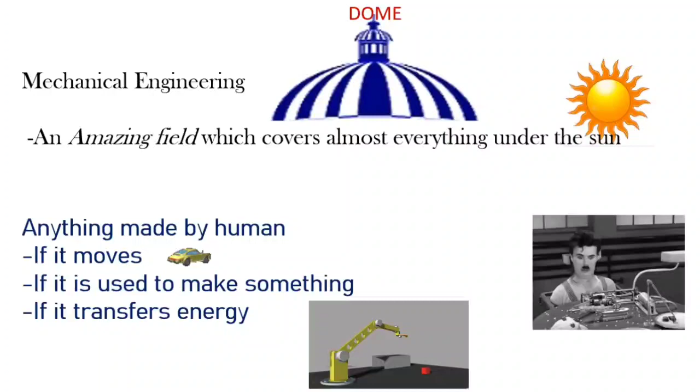Mechanical engineering is an amazing field which covers almost everything under the sun. That's why I have put a symbol of dome, which is inclusive of all the other engineering fields. Our human body has so many reflexes and reactions, which happen due to energy intake, and it's a continuous process from the birth of a child to death. I meant to say our human body itself has so many mechanisms.

The same can be installed in a non-living thing, which itself is nothing but mechanical science. If you take an example, anything made by human, if it moves, it belongs to mechanical engineering. If it is used to make something as a product, again it belongs to mechanical engineering discipline. If it is related to transfer of energy, again it is related to mechanical engineering.

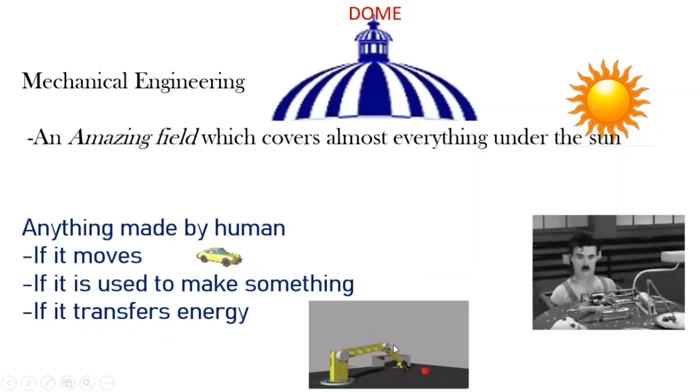Look around you, you can identify the mechanical engineer's role. In our day-to-day life, we use so many engineering products without knowing the hardship spent on these products. If we try to question how it is made, we can understand the diversity of engineering application.

If we take a look at a phone, it has multiple operations performed on the same gadget, and those operations are made tangible by various manufacturing processes. Phone is a logical device, it is an electronic device, it is a mechanical device. Again, it obeys laws of physics in receiving and transmitting signals.

The same thing can be applied to many other products like laptop, our mouse, maybe a TV, a sofa, or a cup. We make use of cup in our day-to-day life. To make a cup again, we need a mechanical device. Simple to complex products are done by mechanical engineering.

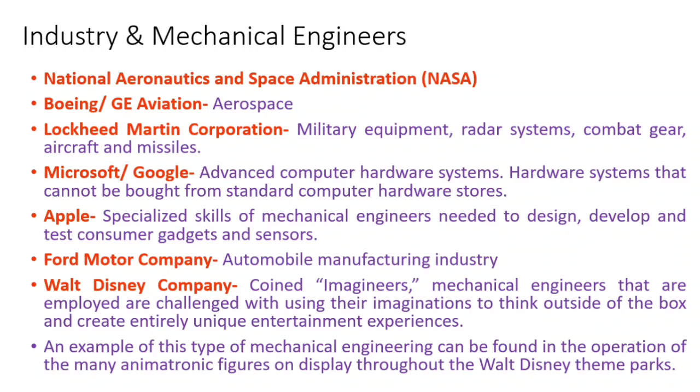Again, I've taken Walt Disney Company. It's an entertainment sector. Why is a mechanical engineer in an entertainment sector? Look at this—they are coined as Imagineers, mechanical engineers that are employed are challenged with using their imaginations to think outside of the box and create entirely unique entertainment experiences. An example of this type of mechanical engineering can be found in the operation of many animatronic figures on display throughout the Walt Disney theme parks.

Robotics and mechanical engineers. Robotics started with the concept of continuing manufacturing in hazardous environments, maybe in nuclear or chemical industries, possibly in unmanned conditions. This is how robotics evolved.

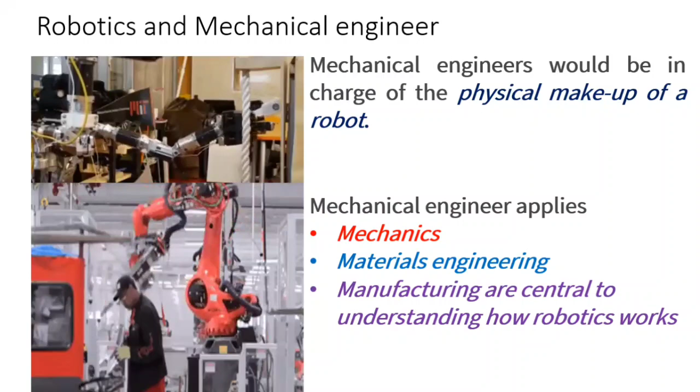As technology advanced, interdisciplinary branches tied up together for one application. You can see in this figure a robotic arm performing one operation. To perform that operation, multidisciplinary facets are brought together with mechanical engineering as the core physical makeup. To make robotics happen in real time, mechanical engineers acquire and apply mechanics, materials engineering, and manufacturing sciences, which are central to understanding how the robotic works and is made.

Here I have mentioned aeronautical, aerospace, and astrospace, which are specialized fields of mechanical engineering. Aeronautical relates to aeroplanes and fighter jets, which operate within the Earth's atmosphere. Aerospace includes rockets and satellites, which are operated above the stratosphere. Astrospace, an example is Hubble's telescope. Vehicles which are used to study the astronomy of galaxies also fall under this category.

To make all these products happen, mechanical engineering is required, and a certain set of standard operating procedures are followed: designing, analyzing the designed plan, running simulation, establishing operating standards for the product, and developing prototypes. These prototypes are again tested before being made into a product. Of course, this slide covers aeronautical, aerospace, and astrospace.

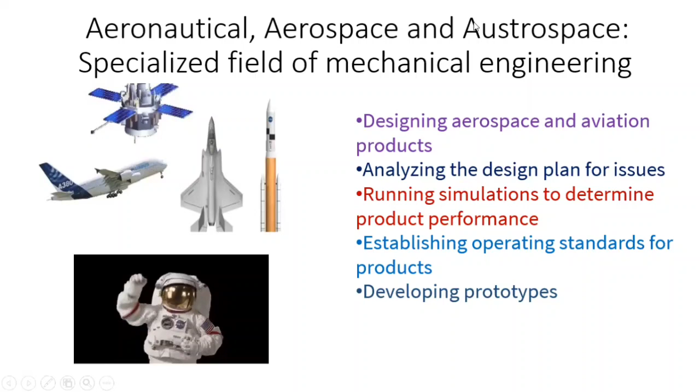If a piano has to be automated with the exact notes as the output, we can make a prototype of a finger robot which can press as well as traverse along the length. The operation of the finger is mechanical. This operation is controlled and actuated by the electrical signal. These signals are generated by the microprocessor, and these microprocessors are again coded with a set of operations. Here again, I have shown a mechanical, electrical, and electronics interface for a mechatronics device.

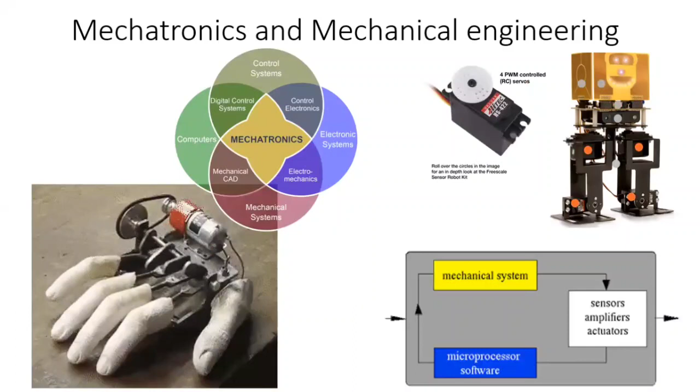Electrical engineering, power sectors, and mechanical engineering. Any industry needs electricity to operate. On Earth, electricity is generated using conventional and non-conventional sources. To generate power from these materials, a combined system of mechanical and electrical is a must. Dams, turbines, windmills, solar cells, tidal actuators — these are the mechanical systems incorporated along with AC or DC generators, amplifiers, and transformers, which are considered electrical devices.

But in reality, electricity itself is not a physical quantity. Mechanical devices are the carriers of electricity. You can see a generator here. If you look at it, you can make out that it's all a mechanical component. And here I have shown a power grid, which is energy storage technology, and has a relationship with or is an integral part of mechanical engineering.

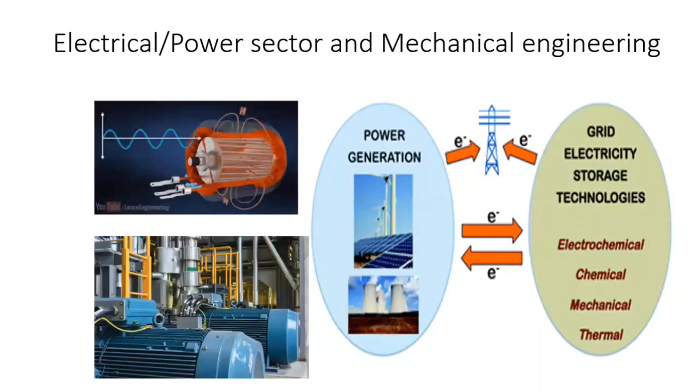Here we are with structural and mechanical engineers. Any workspace and living space is of prominent importance. Any structure will be subjected to force, maybe due to gravity, or forces acted by the atmosphere, or force due to self-weight, or maybe due to external disturbances. The rigidity and stability of the structure has to be clearly analyzed before actual construction, which makes the entire process cost efficient. Mechanical engineers will be able to build and design a 3D model of the structure, apply forces to it at various points which are within the factor of safety, and analyze for any faulty areas.

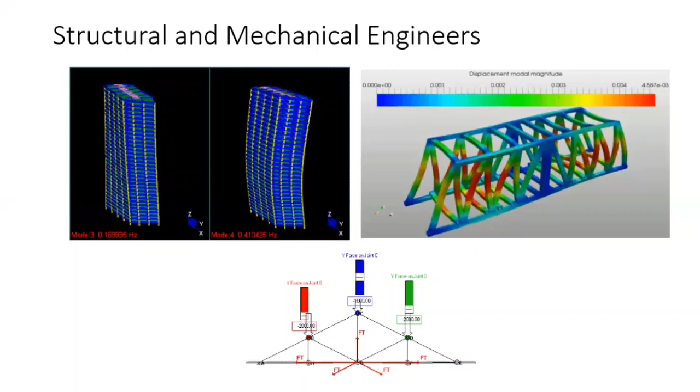An example of artificial intelligence is Alexa. To assemble the products or components of Alexa, it has to be manufactured — obviously, this belongs to a mechanical engineer.

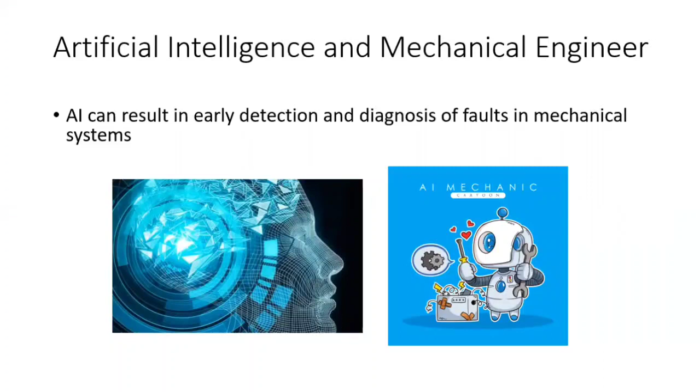Here we are with the biomedical field and mechanical engineers. Any human being may require some precision surgeries, so the entire system needs to be sophisticated. To achieve this, we combine robotics, mechatronics, image processing, and mechanical systems. A display of a prototype biomedical device is shown, which is used for multiple operations at multiple points with high accuracy.

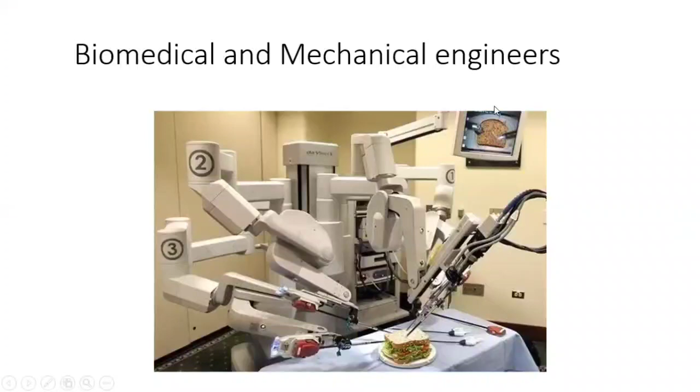Till now, we had gone through some of the applications where mechanical engineering plays a vital role. Now let us see what is the applied science required by a mechanical engineer.

Mechanics deals with motion and force. The force may be related to statics or dynamics. It provides the knowledge of force and its outcome when applied on an external body, with relevance to any matter on earth, whether solid, fluid, or matter in space. We can analyze the relevant motions.

Here I have displayed some mechanisms which are related to mechanics. For example, two solids here, gears, which are in mesh with each other, transfer motion from one point to another. Here again, it's a solid to solid interaction, a motion transfer. Here it is fluid to solid motion transfer. In this case, it is the interaction of the gravity force of the object in space with the earth.

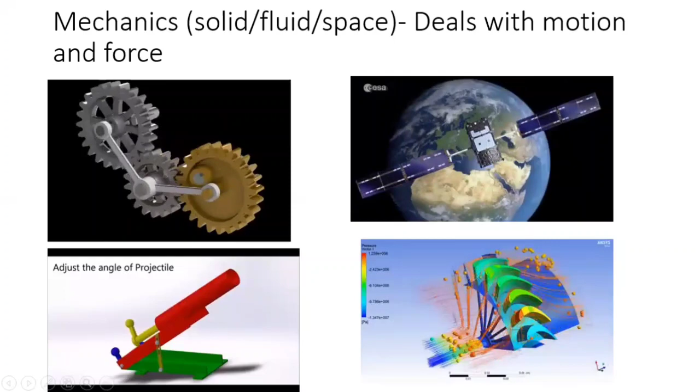Thermodynamics: several materials on earth possess huge amounts of energy which is liberated with the interaction of heat. The science which relates energy and its useful work is broadly termed thermodynamics. Here, an IC engine is displayed, which is a mechanical device, an internal combustion engine. The purpose of this device is to extract work from the fluid, which is nothing but a fuel.

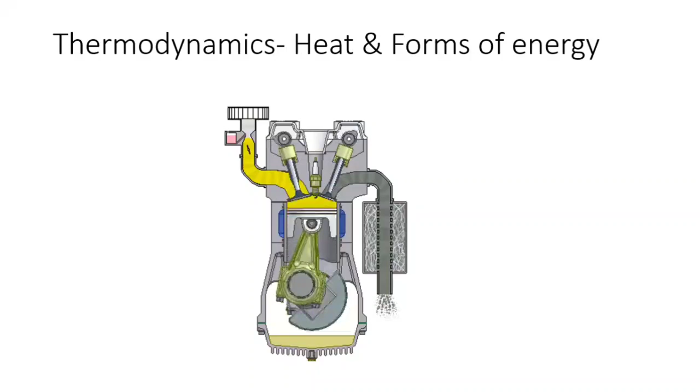Design and analysis, a core science related to mechanical engineering. Design has two important aspects: stability of the product and the lucrative aspect. It should be good and look good. Both aspects all of you prefer. Here comes the design aspect.

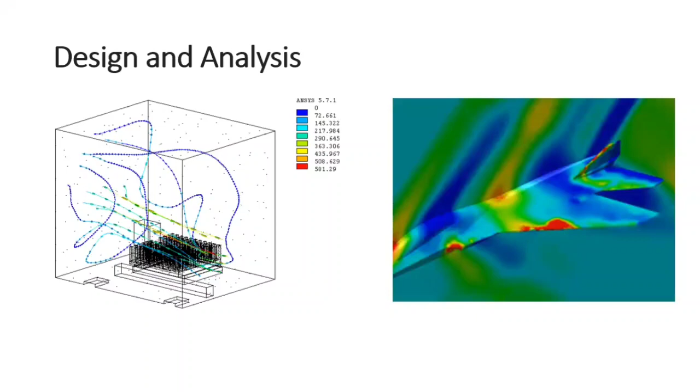From a simple to a sophisticated product, design and analysis is required which can reduce huge cost compared to the trial and error method. To accomplish this, several mechanical softwares are used as analytical tools.

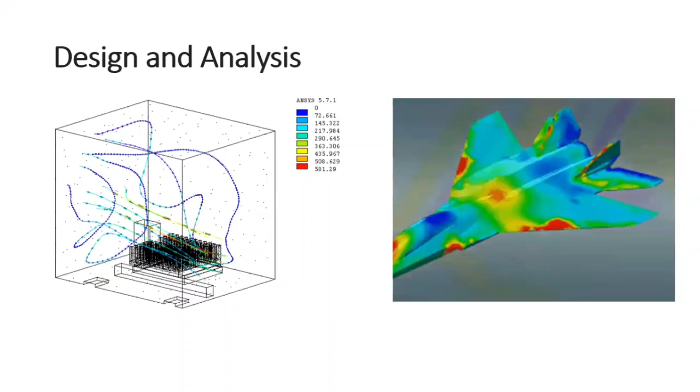Materials, again a core science related to mechanical engineering. Material may be a general material, it may be a metal, it may be a polymer, it may be a ceramic, a composite material which is a combination of two materials, it may be a smart material, related to micro and macro level.

We have seen from the Stone Age, Bronze Age, Iron Age, and in the Iron Age, many of the cast iron products from the olden days are replaced with stainless steel, and stainless steels nowadays are replaced with carbon fiber composite.

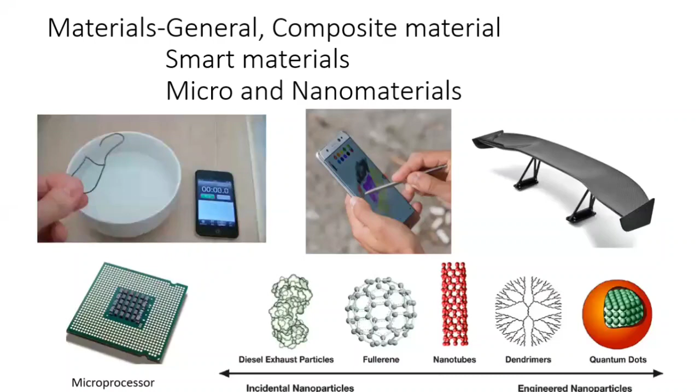Manufacturing is a vast field which is used for making products from raw material. Manufacturing includes the production of simple domestic appliances to complex products. Manufacturing involves many subsets like machining, joining, forming, and casting.

Here I have shown a domestic appliance and an assembly line of an iPhone.

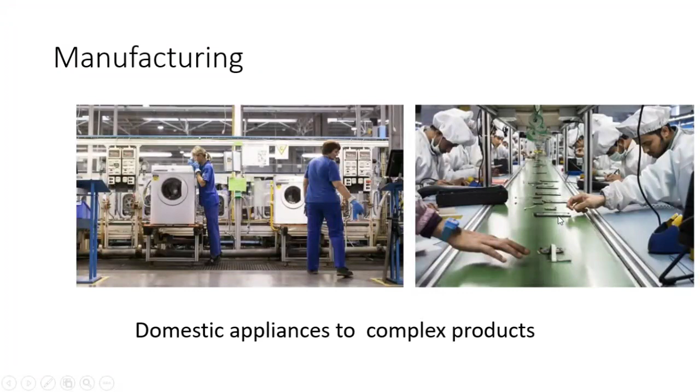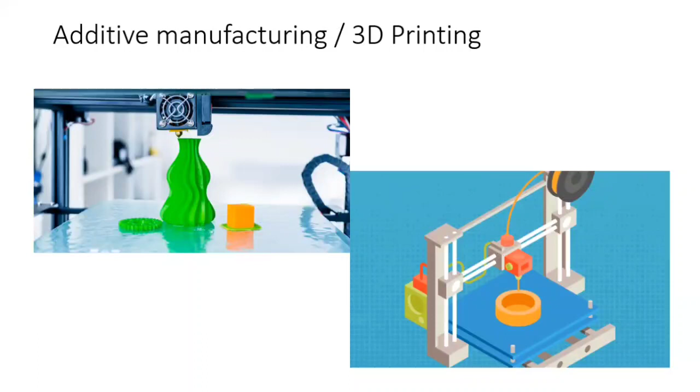An advanced manufacturing technology is related to 3D printing or additive manufacturing. It's a precise manufacturing process which can be tailor-made for any product. 3D printing or additive manufacturing produces a 3D object from a digital 3D model or print.

Finally, mechanical engineering is all about movement, the application of science and technology to solve real world problems through the manipulation of moving parts. Engineering is problem solving. There are problems in every field, so if you like to solve problems, you would never be bored in engineering. Creativity translates to innovation in engineering, which again says that if you are creative, you will have ample opportunities for creativity in every field. None of these fields is saturated, especially when it comes to technology. Thank you.

Engineering is not just a tag, it's a way of living. The process of molding you all for the next four years will not just give you a degree, rather it gives you a personality. Personality is the representation of your experience and the acquired knowledge. The current life you go through becomes tomorrow's experience, and hence every moment of yours counts.

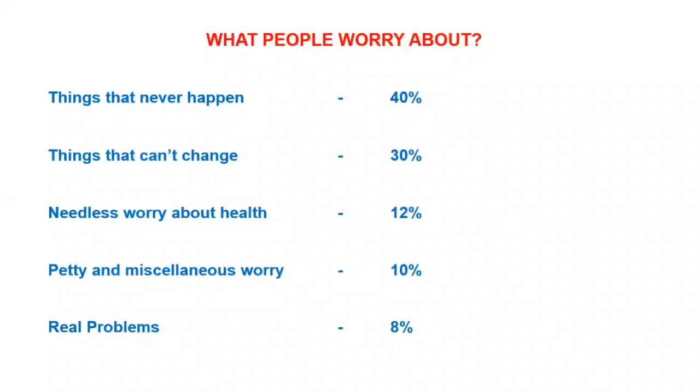A SMART goal. To achieve the goal, the following SMART approach is required. S stands for specific, M stands for measurable, A stands for achievable, R stands for realistic, and T stands for time bound. The time bound is very much required for human beings, not only for students.

Time is time. Right now the time is morning 10 o'clock, the same 10 o'clock Thursday, today's date is 24th of December 2020. You can't get it back. So time is very precious. Kindly make a note of it, please.

Setting the goals, there are 3 different categories. Number 1 is long-term goals, 3 to 5 years. Number 2 is short-term goals, 6 months to 1 year. And finally, immediate goals, at least 1 month or 30 days is required.

Long-term goals is within 3 to 5 years. Now in 2020, you are admitting into first year, 2020-21. Then 2021 to 2022, 22 to 23, 23 to 24. At the end of 2024, April or May, you will be in position to complete your BE degree. After BE degree, that means 3 to 4 years, so it lies between 3 and 4 years. That means long-term goal. What is your long-term goal?

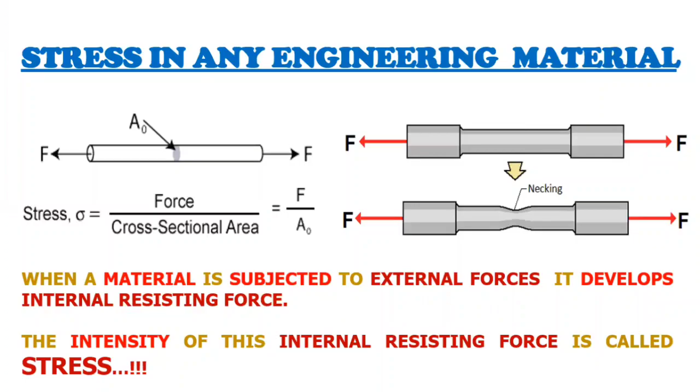So now what is stress in a material? I am trying to link stress in a material to stress in a human being. For the same shape and size, developed stress is the same in all materials. Similarly, for a given situation, every human being is subjected to the same amount of stress, whether he is a fatty person or lean person, whether intelligent or not, the stress is same in each and every person.

But how he responds is different. The ability to withstand the same amount of stress is different for different materials, meaning different materials fail or collapse at different stress levels. Similarly, for a given situation, every human being acts differently when subjected to stress - it is the ability of each person to overcome stress.

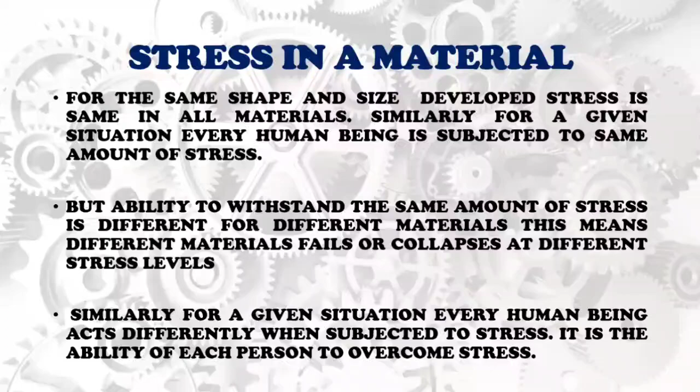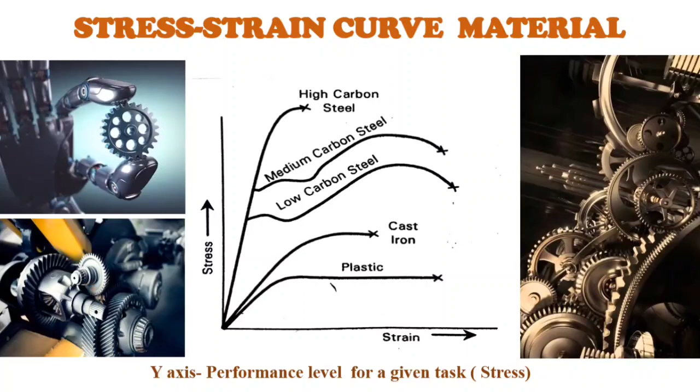Let us discuss the stress strain curve of a material, where we have shown some materials: plastic, cast iron, low carbon steel, medium carbon steel, high carbon steel. You can see plastic can withstand a low amount of stress, whereas high carbon steel withstands a high amount of stress. Similar to the material, each person's ability to withstand stress is different. Here the y-axis represents performance level for a given task, that is stress.

It is observed that different materials have different stress withstanding abilities. Any material in this universe withstands some amount of stress. Therefore, any person in this universe is able to withstand some amount of stress.

Now the question is, is stress good or bad? The immediate feeling someone has is that stress is bad. No, it is not - stress is not bad, it is good only. So when it is good and when it is bad, we will discuss in detail. Feeling stress is perfectly normal, which means stress is key for survival. Three key benefits of good stress are: good stress helps in adapting and coping with the situation, good stress helps increase performance levels, and good stress encourages creativity.

Good stress helps in adapting and coping with the situation. This means good constructive stress can enhance the ability of the immune system to respond and adapt to sudden changes. This stress response is the immediate, unconscious mobilization of energy and resources when faced with any demand.

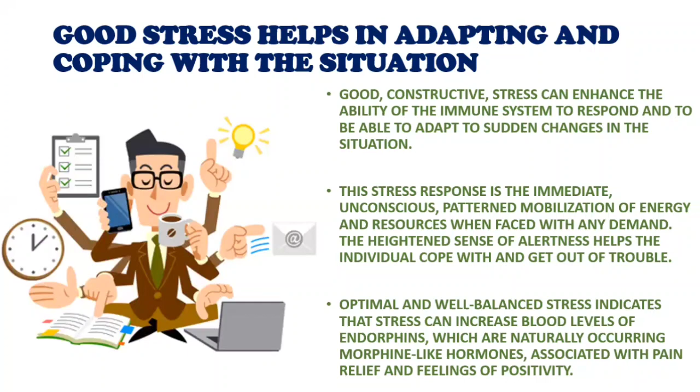Good stress helps increase performance levels. It means a certain amount of good stress is necessary for optimal performance. So good stress can also be motivating to deal with deadlines. Stress tends to occur naturally, and this experience is essential to personal growth, change, development, and performance at work and home.

Good stress encourages creativity. This type of good stress is important for creativity. It can be a spur to look for a competitive edge and force people to change and come up with innovative ideas to solve the problem. Stress is channelized into a positive desire for change, which helps correct problems and improve performance, thus benefiting them psychologically and emotionally.

Is stress good or bad from a student's perspective? Let us think about whether a student always says, I am stressed too much. But let us analyze what happens when the student is stressed.

For a student, feeling stressed will motivate him to get good grades by focusing on his or her assignments, tests, exams, etc. By enhancing memory, this means stress is beneficial, it's good. Therefore, stress is a performance indicator, a burst of energy that basically inspires one to set his or her goal.

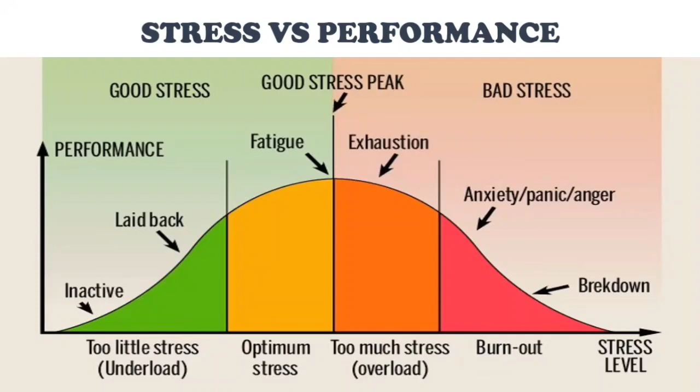Now, when stress is bad, as discussed previously, stress-withstanding ability varies from person to person. Hence, there will be a limiting condition up to which he or she can withstand the stress. The ability to withstand stress and perform up to the expected level depends upon physiological, psychological, and behavioral changes, referring to body, mind, and behavior respectively.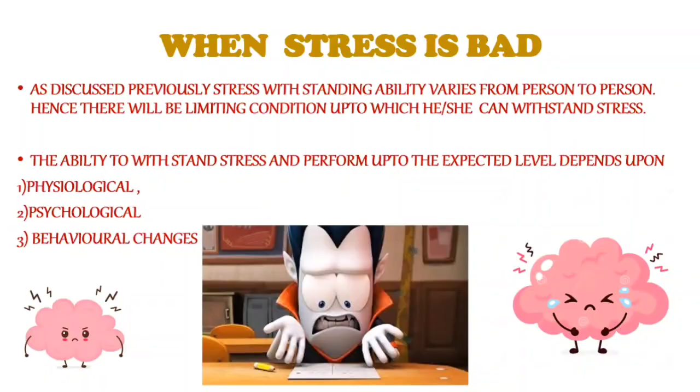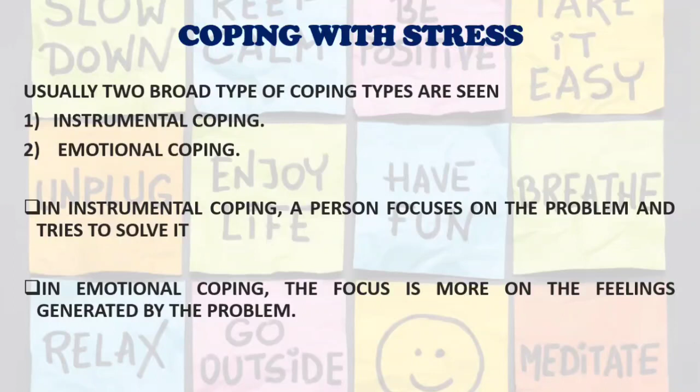Now, coping with stress, there are usually two broad types: number one, instrumental coping; number two, emotional coping. In instrumental coping, a person focuses on the problem and tries to solve it on his own. In emotional coping, the focus is more on the feelings generated by the problem.

Now, methods or techniques to reduce stress: how we can reduce stress levels to perform better. When a person feels the stress level is bad, what should he do? He should keep some methods or techniques to reduce the stress: eating healthy food, maintaining a diet, good exercise and relaxation, and behavioral self-control.

In summary, stress is inevitable, very much needed to be alive and survive. If stress is not there, it is an indication the person is not alive. For a student, stress is a motivator to achieve good grades, name, and fame. But for an employee, stress is a motivator to achieve increments and promotion.

But too much of anything is bad. Hence, taking too much stress is detrimental to one's career and life. Stress can be reduced by following a healthy diet, exercise, and self-control. Thank you.